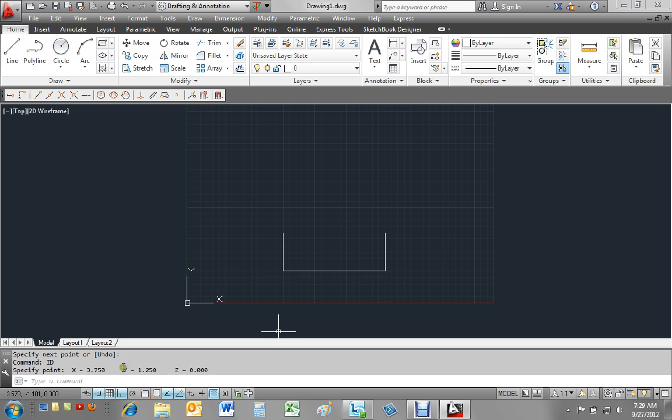So we'll get right over that snap point and press enter. Now, if you look in the command line, and yours might be on the bottom of the graphics area, you'll need to expand it to see it. Your X point is 3.75, your Y is 1.25, and your Z is going to be 0 because we're not doing 3D.

So that's your last point entered now. That's stored in AutoCAD. So when I use the relative coordinate symbol, the @ sign, it will remember that as the last point entered. I'm going to place my circle, which is 1 on the X and 0.75 on the Y.

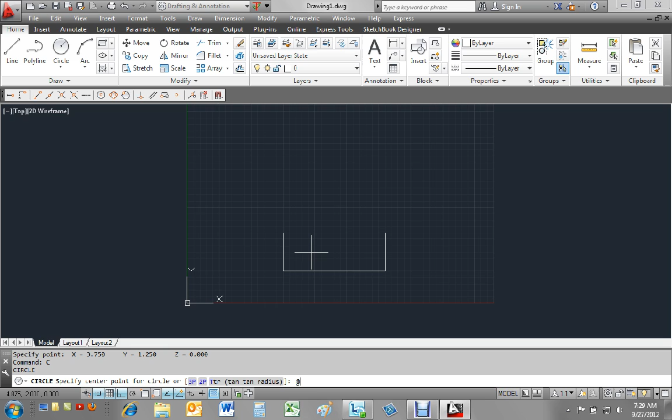So I'll go to circle. It'll ask for my center point, and I'll say @ sign, and I'll go 1, comma, 0.75. Enter. And then it wants to know the radius, and the radius is 0.5.

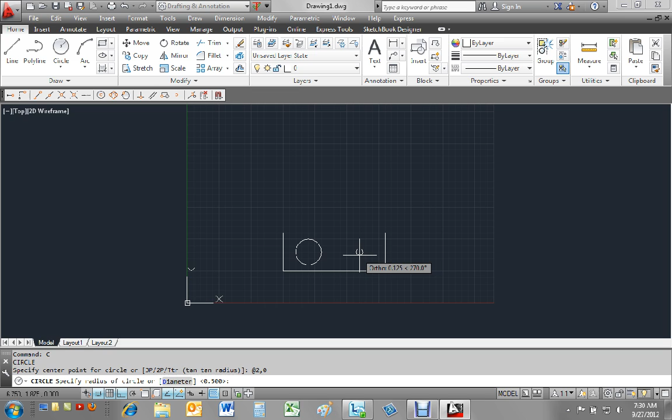Now the center of that circle becomes my last point entered. So I want to draw a circle over here. I'm going to do circle and relative move. I'm going to go over 2 inches on the X, and now 0 on the Y because I want it to be directly across from it. And then it's going to use the same radius, so I just press enter.

Alright, the next object will be the center of that larger circle at the top, what looks like some kind of hoop, racetrack almost. It is 5.5 inches from the bottom, and we have to do a little math. We'll subtract the distance from one circle that we just entered from the bottom, which is 0.75, from the total distance from the bottom to the circle, 5.5. So 5.5 minus 0.75 is 4.75.

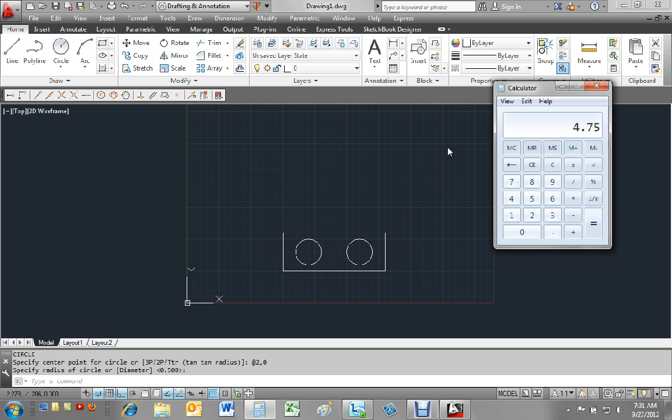Okay, X that off. And now I go to circle, and my relative move will be on the X. I'm going to go back 1 inch to the center. So I type 1, comma, and then 4.75 on the Y. Oops, I forgot to put the negative sign in.

So I'll have to undo that operation. I'll escape and undo. Let's type circle from last point entered. We'll go -1, comma, 4.75.

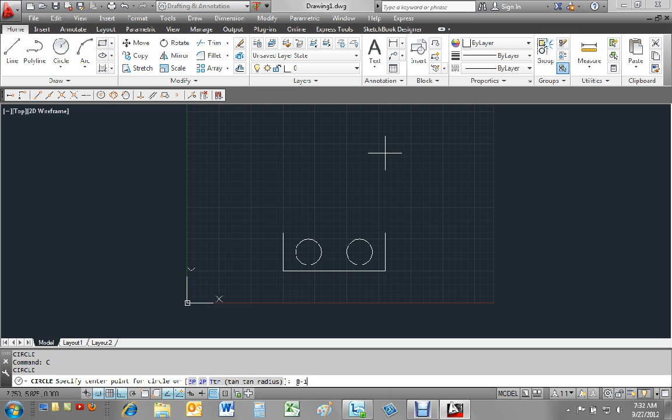Okay, my last point entered was altered, so I'm glad I'm making some of these mistakes, some that you might make. So let's reset the center of our circle as our last point entered. So ID, and that looks like the center, but to be sure, we'll type CEN, enter, and hover near the edge of the circle to turn on the center snap point, and then snap.

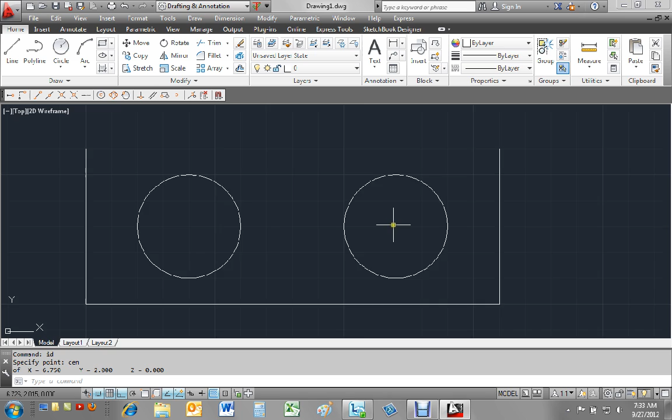All right, now let's try that again. Circle and relative move, -1, comma, 4.75. Success. And the radius is 0.75.

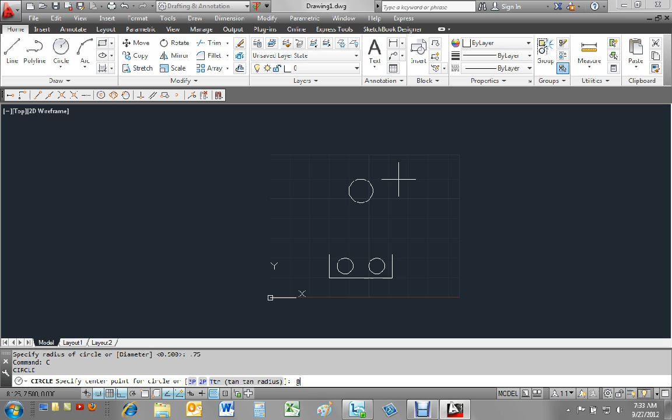Okay, now we want to do another circle at that same location. So I'll go circle and the center point - many different ways to do that. To find that center point, I'm just going to go from the last point entered, 0, 0, and then the radius for it is 1.5.

Alright, so that gives us the foundation for the rest of our arc drawing that we need to do. We will need a line that starts at 2.25 from the bottom and basically intersects our two inside circles. Okay, I'm going to go ahead and stop the recording and start up part 2.